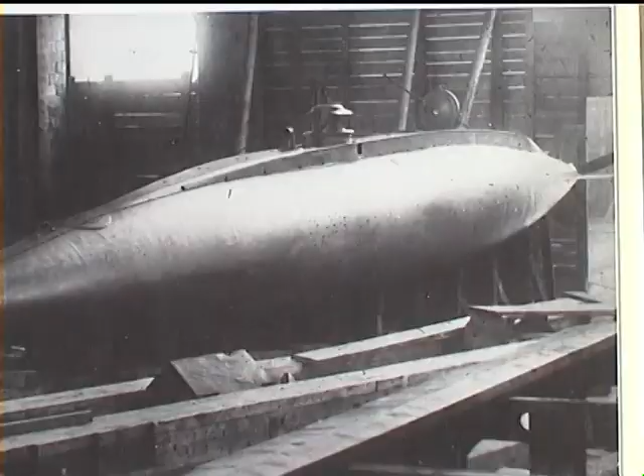Churchill once famously said that the only thing he really feared was the submarine. But it wasn't always so. When submarines first stole upon the scene, they were unanimously condemned as being both underhand and the spawn of the devil. But war changes many attitudes, and here in the sleepy village of Southpool, deep in the South Hams of Devon, the parish church contains a small memorial to a wartime disaster that was to change the face of naval history and propel the submarine into the forefront of the war at sea.

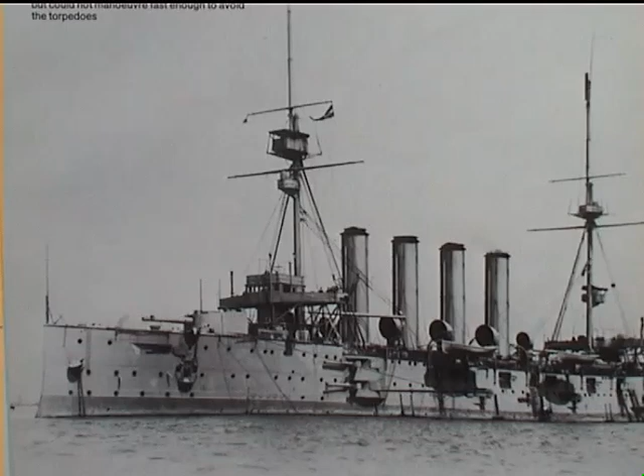Just after the outbreak of the Great War, on the 22nd of September 1914, Midshipman Froude, aged just 16, was serving on board the battle-cruiser Cressy, which was sailing in company with the cruisers Hogue and Aboukir in the North Sea. At 6 o'clock in the morning, Otto Weddigen, in command of the German submarine U-9, came into contact with the battle-cruisers and sank all three in under an hour, causing the loss of over 1,100 officers and men. For the Royal Navy, it was the greatest loss of life since the Battle of Trafalgar, and brought home to them the terrifying reality of submarine warfare.

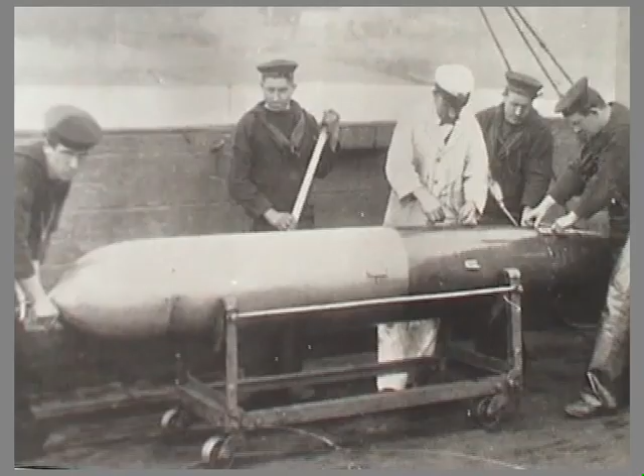The first practical class of submarine to enter into service with the Royal Navy was the Holland in 1902. This submarine had been invented by John Holland, an Irish-American engineer, who basically gathered together all the best ideas from other submarines and with his engineering genius welded them all together into a submarine that was reliable. With a stroke of inspiration, he then armed the vessel with a Whitehead torpedo, providing the submarine with the capacity to strike unseen.

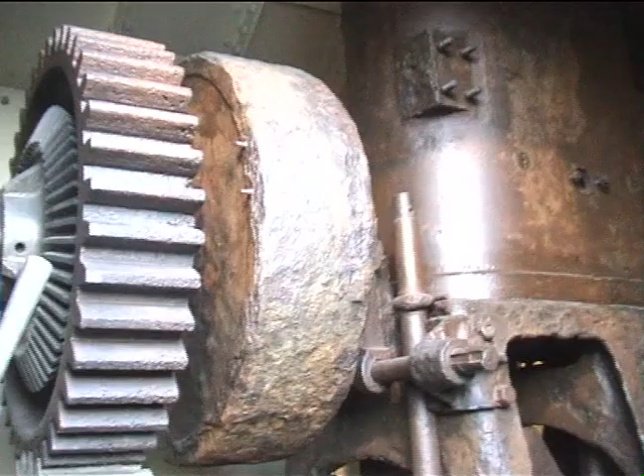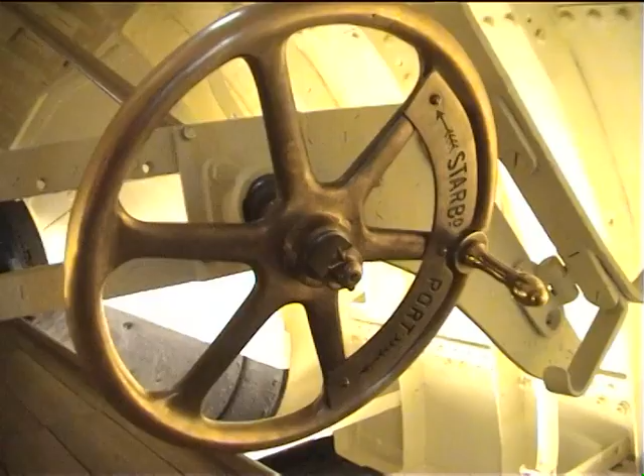For 13 years, the Hollands gave the Royal Navy good service, but as can be seen from this preserved example of Holland 1, the very first Royal Navy submarine, they were not the sort of craft to inspire confidence. Inside, the hull had no watertight bulkheads, and for a crew it was extremely cramped, as the whole hull was devoted entirely to the workings of the submarine, leaving them with precious few comforts. An 18-inch torpedo tube took up most of the bow, and the rest of the space contained the engines and batteries.

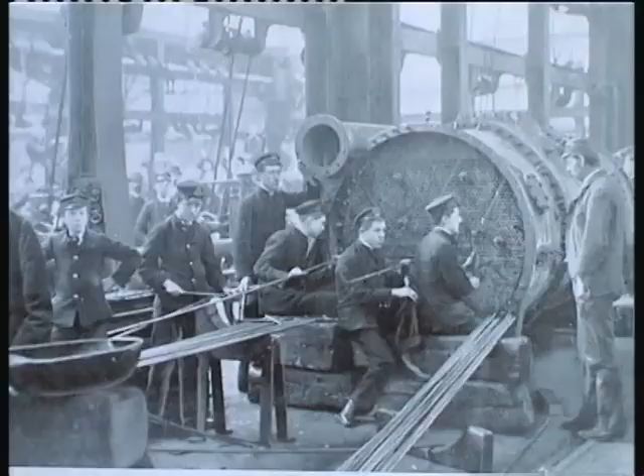By the time the Hollands had started their service, the A-class was already being designed. They were to be the Royal Navy's first all-British boat, and were a joint venture between the Admiralty and Vickers Maxim. The A-class was to be 40 feet longer than the Holland, at around 105 feet, and have two torpedo tubes arranged side by side in the bow. The submarine was to be powered by a petrol engine capable of developing the then unprecedented amount of 550 brake horsepower.

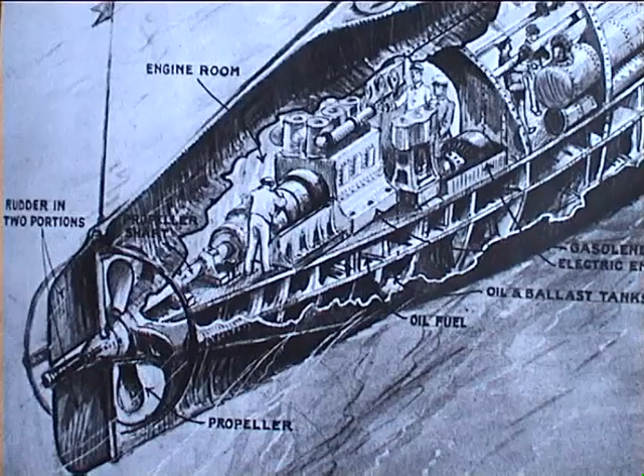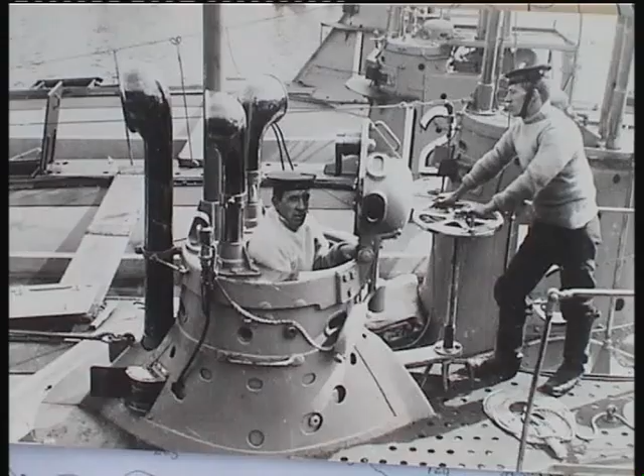Although they were to be an improvement on the Hollands, they had a number of design defects, and as a result the A-class suffered an inordinate number of fatal accidents, with the loss of at least 58 men in the run-up to the outbreak of the First World War. Although many of the fatalities were caused by petrol and battery explosions, or suffocation due to petrol fumes, the most common causes were collision and the submarine's inherent instability due to a lack of a sufficient reserve of buoyancy.

The ever-present danger of collision was illustrated by the sinking of the A1 in March 1904, the Royal Navy's very first submarine disaster. With her hull just underneath the waves, the submarine A1 was carrying out a mock torpedo attack off the Nab lightship when she was struck a glancing blow by the liner Berwick Castle, which sent her straight to the bottom, killing all her crew. The sinking of the A8 a year later gave a timely reminder about the lack of reserve buoyancy in this class of submarines.

Launched on the same day as the A7, the A8 already had a reputation for being unstable and used to frighten her crews by diving without warning. On the 8th of June 1905, she was on manoeuvres in Plymouth Sound near the breakwater when she started an uncontrollable dive. Water flooded in through the open hatch, and later the batteries exploded, killing 15 of the 19 crew, some of whom were still only trainees.

The whole of Plymouth was stunned by the tragedy, and thousands turned out to line the route of the funeral procession. By a dreadful coincidence, the A8's companion on the day that she sank was the A7, and although she didn't know it at the time, she had just witnessed an event that foreshadowed her own demise.

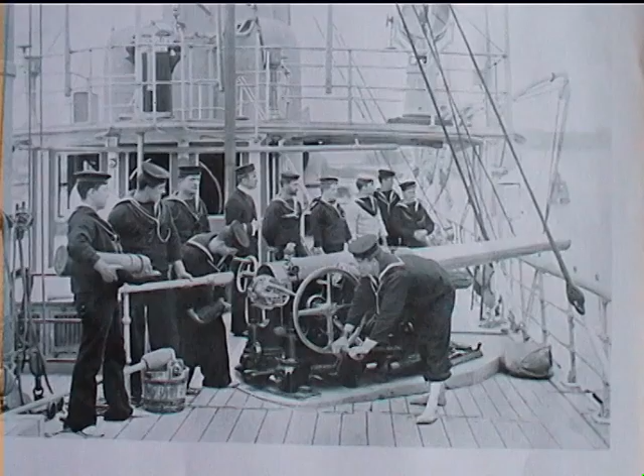The old methods of instruction, using just a book, were discarded, and future gunnery efficiency was achieved by practical methods, like actually trying to hit a target, and the development of gun director fire. He did not forget the ordinary seaman either. Conditions on the lower deck were still very poor. Flogging had only been abandoned 25 years before, and desertions still ran at about 10,000 a year.

Fisher immediately realised that if the men were unhappy, then their fighting efficiency would suffer. To this end he improved the food rations, even ensured that they had cutlery to eat with, and modernised ship sanitation and ventilation systems. This was all to be just in time, as when Fisher became First Sea Lord 2 years later, he would usher in the age of the Dreadnought, a super battleship that at a stroke made all other ships obsolete, and started a naval arms race that found its ultimate expression at the Battle of Jutland.

Little did Fisher realise that his beloved dreadnoughts would themselves be made obsolete by a class of vessel that the Navy only had on sufferance, the submarine. It was against this background of a radically changing Navy that the tragedy of the A7 was about to unfold.

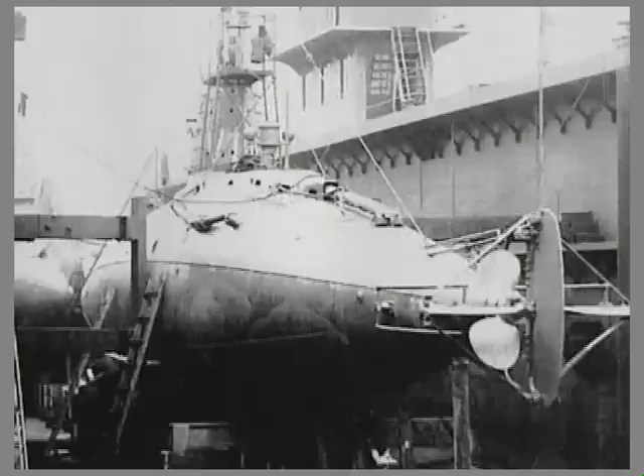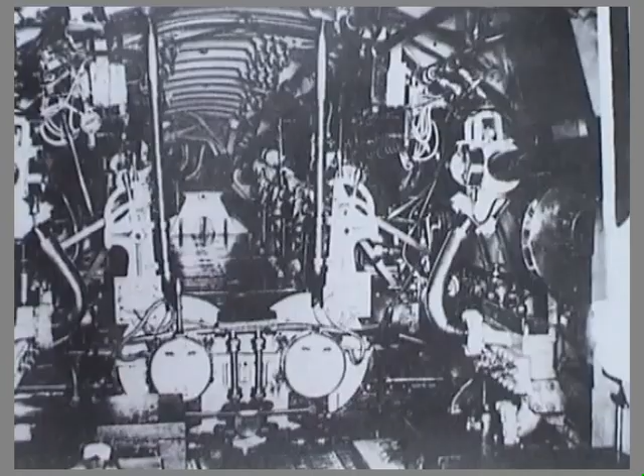The A7 was built by Vickers, Sons and Maxim at Barrow-in-Furness and was laid down on the 19th of February 1903 and launched nearly 2 years later on the 23rd of January 1905. She was 105 feet long, nearly 13 feet in the beam, with a draft of 10 feet 8 inches. To drive her on the surface, she had a 16-cylinder petrol engine, which developed 550 brake horsepower, a colossal amount for those days, and gave her a top speed of 11 knots.

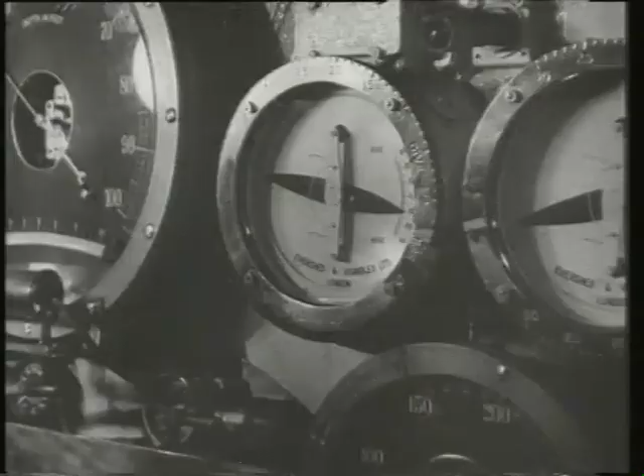For underwater use, she had a 225 horsepower electric engine, which gave her a top speed of about 7 knots submerged. The range of the A-class submarines on the surface was 325 miles at full power, but underwater this shrank dramatically to just 20 miles at 6 knots.

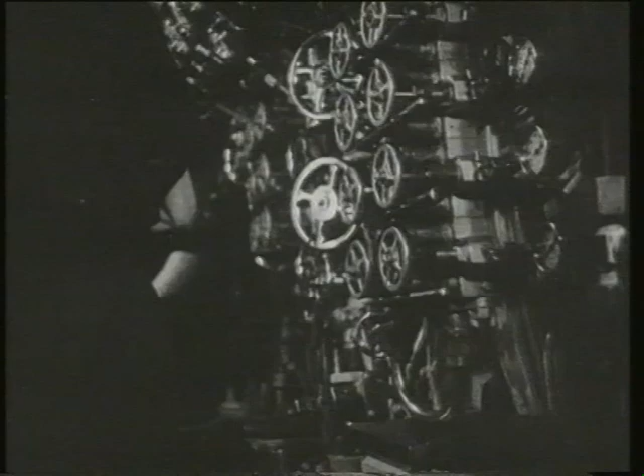To achieve all this, the engines needed 7 tons of petrol, which effectively made them floating bombs. The large petrol engines were notoriously unreliable, and with all the problems of petrol fumes and the risk of explosions, the Navy was forced to pursue other options. Eventually they secured a license to manufacture diesels, and by 1908 more and more submarines were equipped with these engines, leaving the dangers of petrol

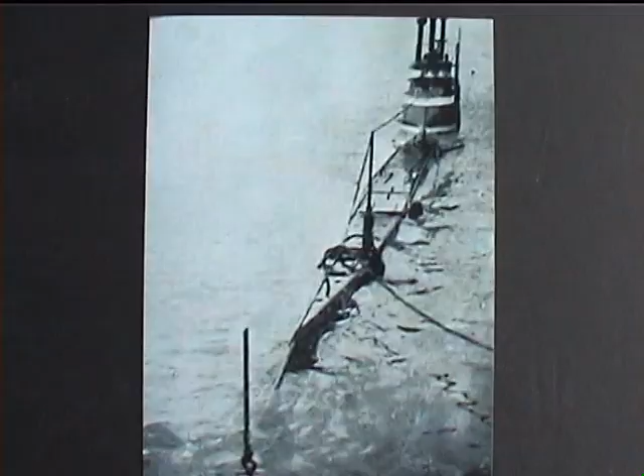far behind. With their short hulls and low freeboard, the A-boats suffered from a lack of seaworthiness. With only a tiny reserve buoyancy and a very low conning tower, the boats were far from suitable for the short steep seas around the British Isles. Except in calm weather, the submarines were practically blind when submerged and immobile on the surface. Longer sea passages, especially in poor weather, had to be covered by towing the boats with all openings closed, with the crews subject to great discomfort and hardship.

Because of their unsuitability to make any sort of extended sea passage, the A-class were used mostly for harbour defence and stationed at Portsmouth and Plymouth as part of the 3rd Division of the Home Fleet. The A7 was attached to the Devonport training flotilla, and after the A8 disaster she continued her training duties around Plymouth. In view of what was to happen, it may be significant that whilst the crew of the A7, with the exception of Sub-Lieutenant Morrison, were all experienced submariners, most had not been attached to the boat for more than 3 months prior to its sinking.

The captain, Gilbert Molesworth Wellman, had served in submarines for just over 4.5 years, and the A7 was his first command. Aged 27, Wellman had just recently inherited the Trwythydic estate in Cornwall after his aunt, Lady Molesworth, had been fatally stung by a wasp. Although he took command of the A7 in November 1913, 3 months before the disaster he had been on sick leave for several weeks with a damaged knee, which didn't leave him much time to get to grips with the crew or the boat.

Wellman's second in command was Sub-Lieutenant Morrison, a keen rugby player. But he had only been appointed to the A7 on the 4th of December, barely 6 weeks before the fateful event, and it was his very first submarine. The coxswain, Petty Officer Crowley, was arguably the most important crew member after the captain, and although very experienced, he had only just joined the A7, and on the day it sank, it was only the second time that he had ever set foot inside the submarine.

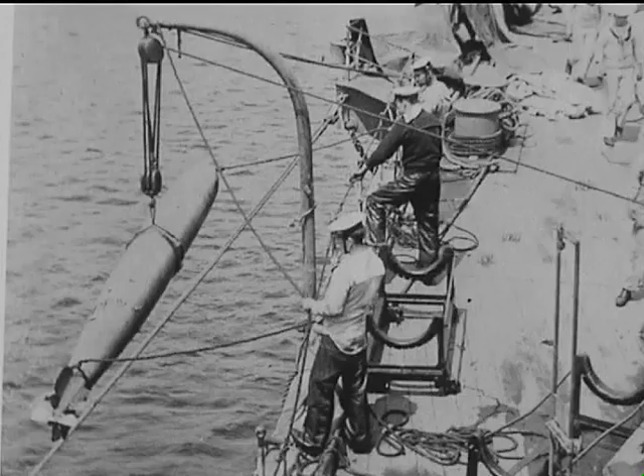As the flotilla came around Rame Head, Lieutenant Wellman, in charge of the A7, found he was being left slightly behind, and as the exercise started he took up his position about 2 miles to the east of where he should have been. The A9 carried out her attacks on the Pygmy, who then recovered her practice torpedoes and made ready for the next part of the exercise with the A7, who was waiting with her hull awash ready to dive. The Pygmy started her run at 11:10, steaming away from Rame Head into Whitsand Bay.

It soon became clear that the A7's attack had failed, so the Pygmy set back along her course to find out where the A7 had got to. At this point nobody felt any cause for concern. But by 11:55, when there was still no sign of the A7, the captain of HMS Pygmy started to get worried, and proceeded to carefully search the area.

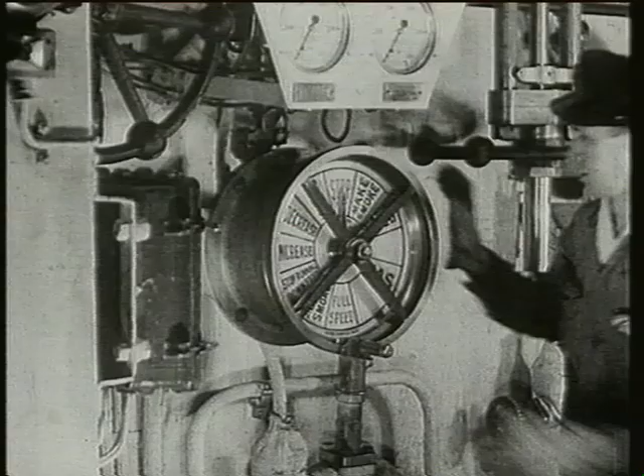At 12:15 a lookout suddenly saw a disturbance on the surface of the water. The captain shaped a course towards this, and 3 minutes later he saw a second eruption of bubbles on the water about 3 miles west by north from Rame Church. The presence of so many bubbles on the surface must have sent a chill through the watching ships, and although they redoubled their efforts to try and find the A7, they could no longer ignore the inevitable. A very serious accident had occurred, so the Pygmy dropped a marker buoy where she had seen the bubbles, and at about 2 o'clock left the scene and raced back to Plymouth to report.

The Navy galvanised itself into action, ordering 2 tugs to tow salvage lighters to the scene. By 3 o'clock the Pygmy was leading the charge back to the scene, where it confidently expected to find the buoy, hook onto the sub and release the crew. As the Pygmy rounded Rame Head and sped towards where she had left the A7, the crew competed with each other to be the first to spot the buoy. The A7 only had a few more hours of air left, and the buoy had to be found fast.

The light, although fading, was still good, but nobody could see the buoy. The captain ordered tugs to search further over in the bay, and the crews searched till their eyes ached, but no sign of the buoy was ever seen. As darkness fell, the search had to be abandoned, and with it any hope that the 2 officers and 9 crew from the A7 were being rescued alive.

The next day word quickly spread that a submarine was lost, and groups of relatives and friends of the crew gathered at the Admiralty buildings in Mount Wise to hear the latest news. The Navy were not willing to release any facts, since they were still coming to terms with the disaster themselves. However, that did not stop the newspapers from revealing all, or just making it up. One local newspaper got completely carried away and insisted that the vessel had been located, that the crews were alive, and that communication had been established via the use of a telegraphic buoy. If only. The sad truth, however, was that the A7 only had enough air for the crew to last 6 hours, and the search had gone way beyond that.

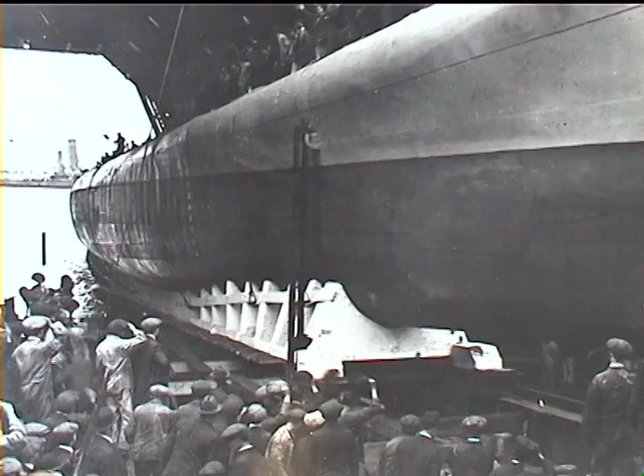Although this would not have had any bearing on the A7's situation, many thought it displayed a lack of planning by the Admiralty, especially as it was in the process of expanding its fleet of submarines at an accelerated pace, which incidentally is probably why the A-class was kept on well past its sell-by date. The need for submarines, any submarines, to carry out training must have been tremendous.

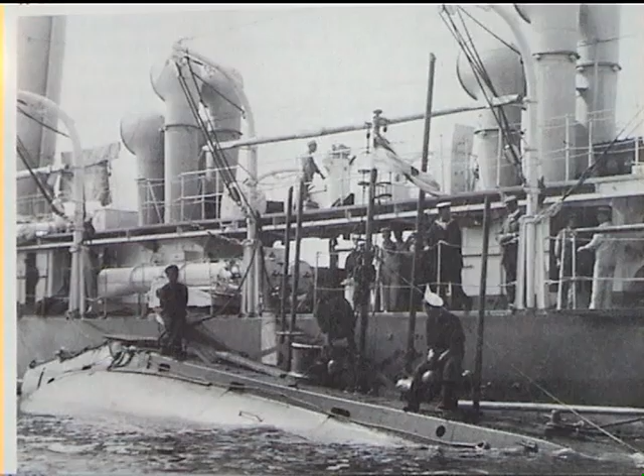In letters to the local papers, the point about the absence of a marker buoy was made several times. In 1911 in Germany, the submarine U-3 was on an exercise in Kiel harbour when for some unexplained reason water started to pour in through her ventilator shafts and she sank. She was equipped with a telephone buoy which came to the surface so that the crew could tell those above the water that they were safe in the forepeak, and they were soon rescued.

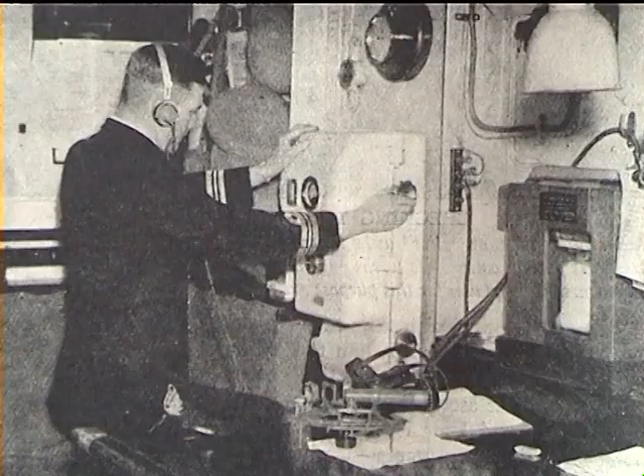A similar event happened to a Russian submarine in 1913, and if the A7 had been issued with the device like later classes of submarine, then at least the boat could have been found more swiftly, and maybe, just maybe, some of the A7's crew might have been saved.

It all smacked of penny pinching, and the Admiralty was roundly criticised on all sides, especially by the foreign press, who had latched onto the phrase "Coffin Ships" and used it at every opportunity, so much so that in the end Commodore Keyes was forced to issue a robust denial and insist that the A-class were as safe as any other class of boat.

Meanwhile, Germany had offered the use of one of its huge lifting barges to help with the salvage operation. This generous offer, however, was politely refused on the grounds that the Navy knew perfectly well what it was doing and didn't need help from anyone. It was a decision that was to come back and haunt them.

As dawn broke on the 22nd of January, the search had been going on for 5 frustrating days, and the crews of the flotilla of search ships were beginning to lose heart. As the sweeping continued, there was a brief moment of hope as another obstruction was found, but when the divers reported it to be another rock, gloom descended upon the search party. As the day wore on, there were other false alarms, but nothing to give the weary crews the faintest glimmer of hope.

Suddenly, with the light starting to dim, a signal was received from HMS Pygmy. She was steaming about 4 miles off Rame Head in the approximate position where the A7 had sunk when her lookout spotted an oil slick. The Pygmy immediately put down a marker buoy, and divers were rushed to the spot. At last, there in 138 feet of water lay the A7. The Navy's search was finally over, but its troubles were just beginning.

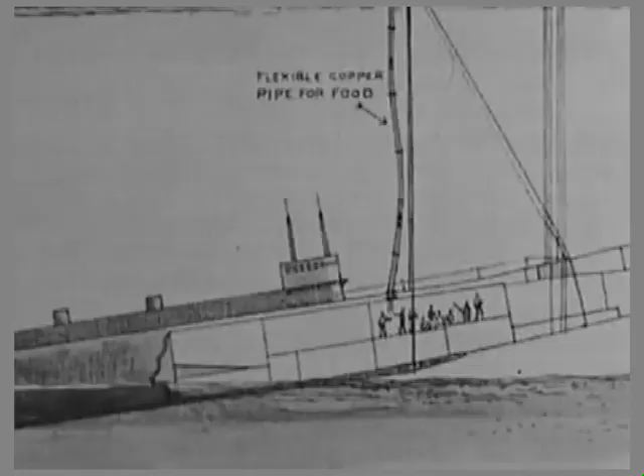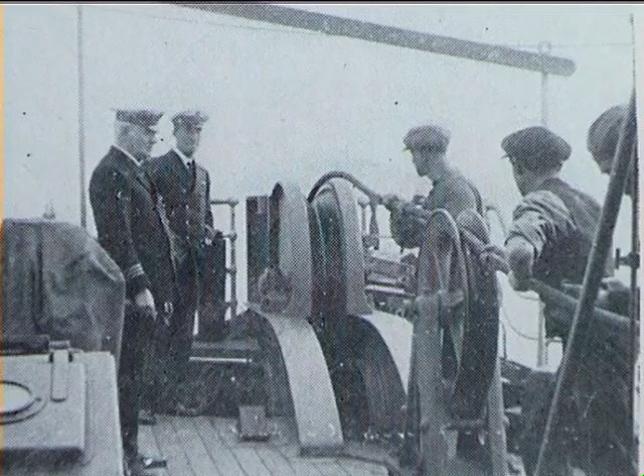Divers had found the submarine in about 138 feet of water, with her stern embedded in 22 feet of mud, with the rest of her hull sticking up at an angle of 35 degrees. The idea was to place a hawser underneath the hull of the vessel and then tow the submarine free. This was attempted during the afternoon, but after all the tug's efforts, the divers reported no change. The A7 was still firmly stuck in the mud. By now the weather had worsened with a big groundswell, so salvage attempts were abandoned for the weekend.

The battleship Exmouth made the next attempt on the 27th of January. A 5-inch hawser was shackled to the bow plate of the submarine by divers, and the other end attached to the battleship's mighty winches. In the event, the hawser fractured the submarine's bow plate, and water started to pour into the submarine, making lifting her even more difficult.

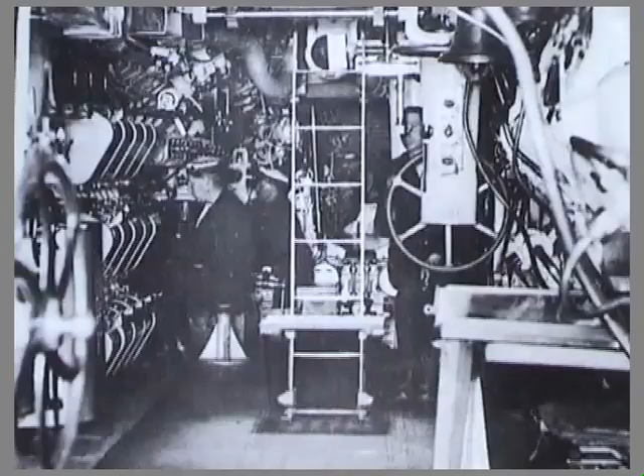With a view to gathering data for the official inquiry into the A7 disaster, a similar craft, the A5, was taken out to Spithead and submerged with all her crew to what the Navy said was a considerable depth, but in fact was only 60 feet, well within her safe range. Once on the bottom, the officers and men worked the hand pumps that were the same as those fitted to the A7 and took the place of the electric pumps in an emergency. The A5 rose to the surface a short time later without any difficulty. What this proved was debatable, as it had been a very controlled experiment, and certainly did not replicate the uncontrolled diving for which the A-class was notorious.

It took nearly 3 weeks for the weather to abate, and on the 17th of February the Navy made another failed attempt to pull the submarine out of the mud. By now the whole effort to salvage the A7 had become an exercise in damage limitation. The Navy was being crucified on all sides for their inefficiency, questions were being asked in Parliament, and the press were publishing highly critical editorials. The whole episode was becoming a huge embarrassment. In the end, the decision was made to have one last attempt and then abandon the A7 to her watery grave.

10 days later, the Exmouth and all the other craft gathered to have one last try. Wires were slung around the A7 and capstans took up the strain. All day the work went on, but to no avail. The A7 was well and truly stuck, and there she and her crew would have to stay.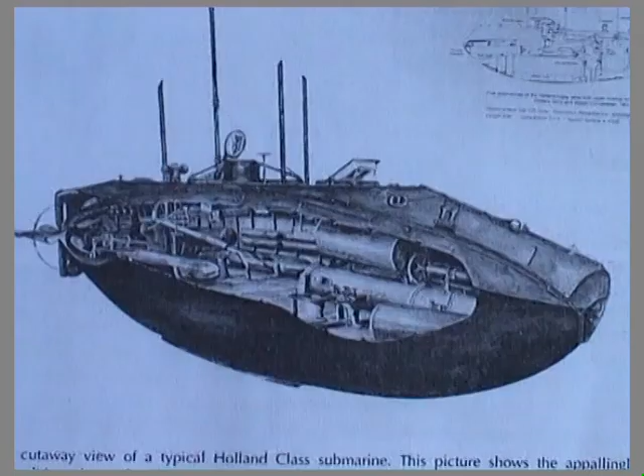So what happened? Why did the A7 sink on that fateful day? Before the notes of the official inquiry are examined, it is necessary to look again at the problem that made the A class of submarines so vulnerable, their pitiful lack of reserve buoyancy. The A class were developed from the original Royal Navy Holland submarine and consisted of a single skin pressure hull with all the ballast and buoyancy tanks carried internally. There were no watertight doors or any partition of the boat whatsoever, so if any water got in, then it could go almost anywhere, especially into the engine compartments.

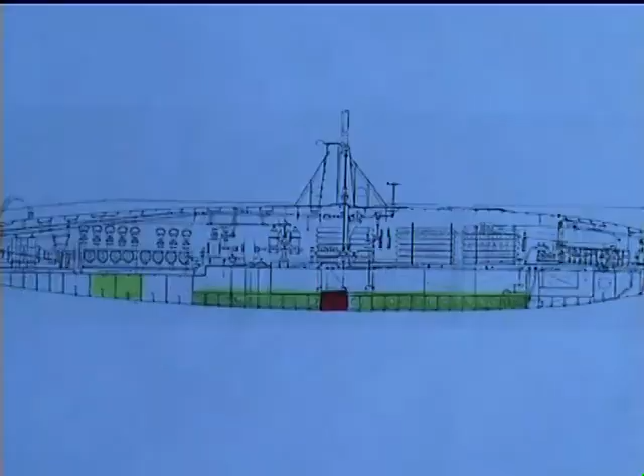The ballast tanks would provide the major buoyancy for the submarine when empty. These tanks were flooded pre-diving to allow the boat to run awash with just the conning tower exposed. At this stage in the diving sequence, this separate buoyancy tank provided 600 pounds of reserve buoyancy that kept the submarine afloat. 600 pounds might sound a lot, but it's only 60 gallons, not much more than 2 large dustbins. Any water entering the boat at this stage would be very serious, as even a small amount was enough to submerge the boat without warning. As the A-boats tended to pivot around their centre of gravity when supported by this tank, the usual practice was to run the submarine with a stern-down trim of about 6 degrees, because when heading into sea, wave action could easily force the submarine's bow down and thereby cause an uncontrolled dive.

By 1914, to dive a submarine from surface trim was relatively simple and well practised, though it was still considered a dangerous procedure in these obsolete craft. The boat would have its ballast tanks flooded to bring her awash, with her conning tower just above the surface. The petrol engine would be stopped, and the electric motor switched in. The hatches and ventilators would be shut, and the stern planes would drive the boat underwater. If all was well, and the electric motor was stopped, the submarine would rise to the surface due to the effect of her buoyancy tank and its 600 pounds of lift.

At slow speeds, however, the stern planes would probably not exert enough effect to overcome the buoyancy tank, so it would have to be partially flooded to achieve neutral buoyancy, thus reducing the submarine's reserve buoyancy even further. But even in this condition, the boat could still surface by moving forward and using its planes to drive the boat to the surface. The buoyancy tank was then blown clear with compressed air to resume surface awash running, and the ballast tank was also blown to bring the submarine as high out of the water as possible. All in all, it was a tricky business, which called for fine judgment from the crew.

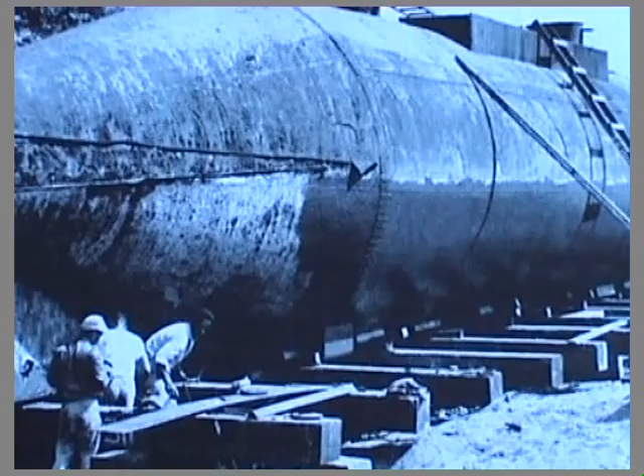The American version of the Royal Navy Holland, the Adder, had been depth tested and found to be unsafe around 100 feet. The A7 was developed from these designs and was basically a stretched version. Although being a larger vessel, it is not known whether she was built with correspondingly stronger materials. If she wasn't, then it follows that she would have been weaker than the Hollands and even more susceptible to damage from excess depth.

The notes from the inquiry show that in order to carry out an attack on the Pigmy, the A7 would have had to head her bows into the choppy sea. She was seen to submerge awash, and when she disappeared it was assumed she was getting ready to start the attack. However, with the propensity of these crafts to dive while running awash, it is fairly certain that her bows were pushed under by the waves before Lieutenant Welman and his crew could shut the hatch and dog the vents. Even if she was only making 5 knots, the A7 was still covering the best part of 10 feet per second, and as she was pushed under, she would have taken a huge amount of water on board, far more than the 60 gallons of her reserve buoyancy.

Not having had the time to exercise and train together for desperate emergencies like this, the crew would have been overwhelmed with the horror of a rapidly filling boat. Frantic efforts by the crew to surface the boat would have only ensured a bows-up attitude, which would have allowed any water in the boat to rush to the stern, destroying any trim that she might have had left and flooding the engines. As the water gushed in ever greater quantities, the submarine would have sunk faster and faster, and as it passed near the 100-foot mark, it is possible that her internal ballast tanks gave way, causing even more water to pour into the stricken boat.